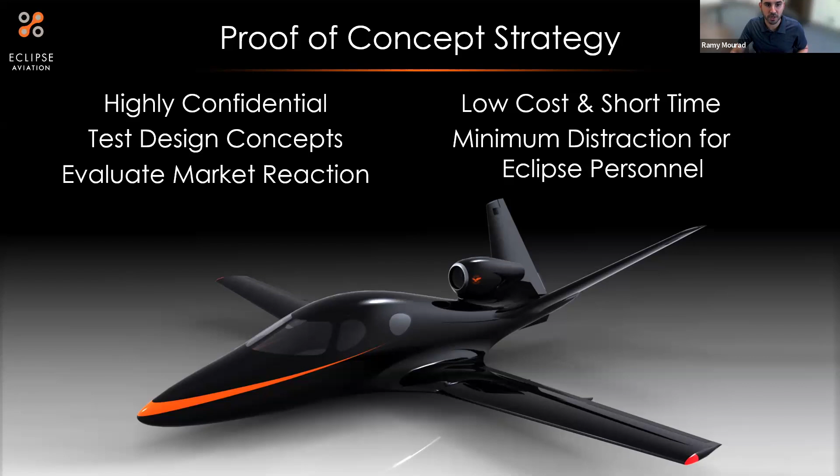So these were some of the very initial concepts that we came up with. One thing that's super important for the concept, it had to be sexy. It wasn't just about performance and being practical, it had to look freaking good. I don't know if you agree with me, but I think it does.

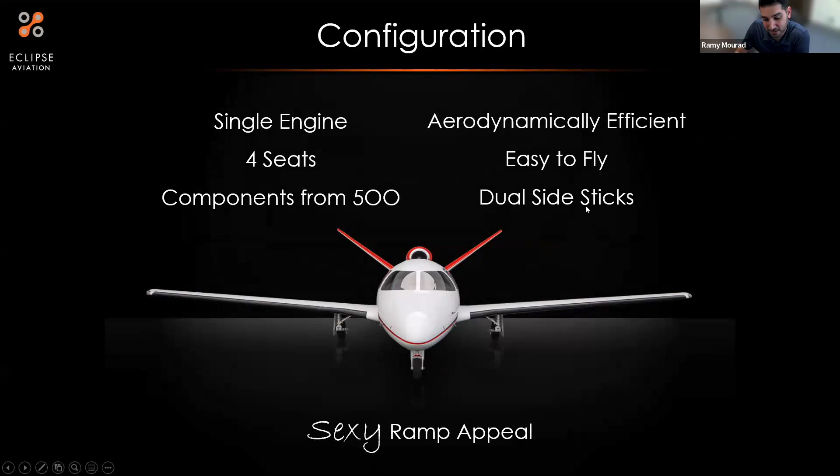Hey Mark, maybe you can talk a little bit about how these players came about. Obviously Eclipse was at the tip of the spear here, but you talked about how Swift got involved because of the performance. How did we pull in Basis, and what was their role?

Why did we have them involved? They're a supplemental type certificate shop, an STC shop. They take airplanes and make them into something a little bit different, so they know how to certify stuff and comply with all the practices you need to build an aircraft that's going to be flown by real people.

They were recommended to us by a company called International Aero in Long Beach, who were going to do the paint job. They said, well, you need to talk to Basis. So we got involved with Basis, and it was a total fabulous, fun time out there.

The year we were putting the airplane together was when they had this multi-week giant summer festival. Remember all the ice cream shops lined up? You'd go outside and there'd be Ferris wheels going, and you'd go to all the different ice cream Whippy shops. Yeah, it was a heck of a lot of fun.

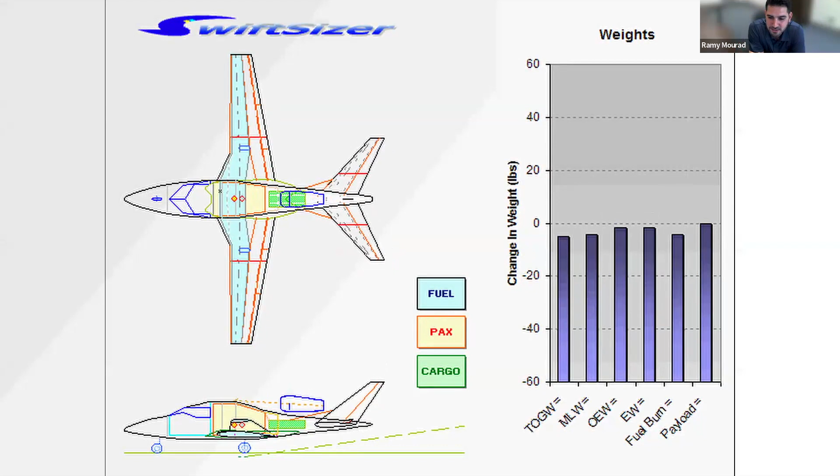Mark is the brilliant mastermind behind what at the time was called Swift Sizer. I think this has evolved several generations since, but maybe you can talk a little bit about what this thing actually does and why it was first put together.

So this is, as some of you who've seen this type of stuff before can probably tell, an Excel tool. It's an airplane sizing tool that lets me try all kinds of alternatives for rigging the engine, balancing the airplane, estimating stability and control, so I know where the fuselage has to go so the aerodynamic limits line up, and capturing the center of gravity vector with fuel burn off and different payloads.

Because it's this kind of visual environment, it's not an optimizer I turn on and let run 40,000 solutions overnight. You really guide it. You look at stuff and learn why something is bugging the solution, making it problematic. Often letting the computer run longer isn't the answer—you have to change something, add a feature that your model of the airplane doesn't have at the moment.

So I've used this on the BAT, the Killer Bee, on our airplane now, believe it or not, and on the much bigger version for the JetZero Z4.

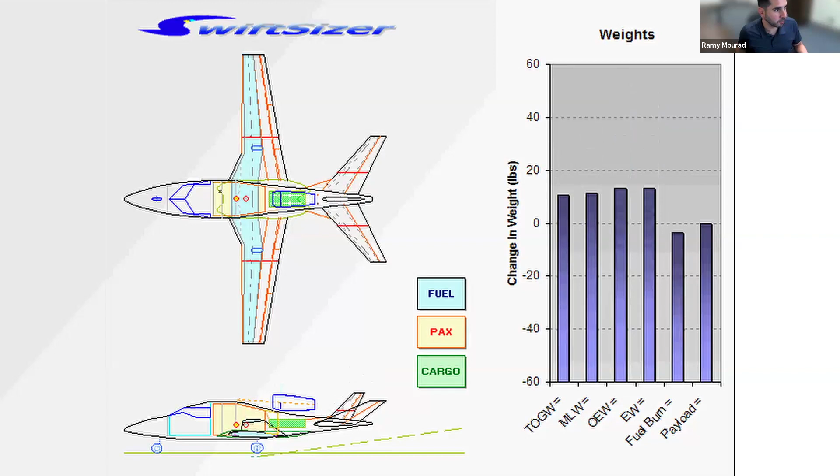So this is where our high level requirements help us configure the aircraft—what's the wing sizing, what's the distance between the wing and the tail, and the engine placement longitudinally. And so we ended up with the design, basically. I made this presentation a long time ago and was pretty excited about PowerPoint animations at the time.

I have a very different approach to PowerPoint these days. But so we got this V-tail mounted behind a single engine, and we wanted to keep it simple with a single engine. So we had to figure out how to deconflict the exhaust from the engine and the tail.

We had to make sure that in a rotor burst situation we're isolated from fuel tanks, and we'll show you some mitigations on how we handled a rotor burst situation with the flight control cables. We actually needed to do a lot of work—wind tunnel testing, CFD, and so forth—on the wake ahead of the inlet to ensure inlet distortion is properly managed. That shaped the spine of the aircraft and helped us decide the width of the aft fuselage from a structural perspective.

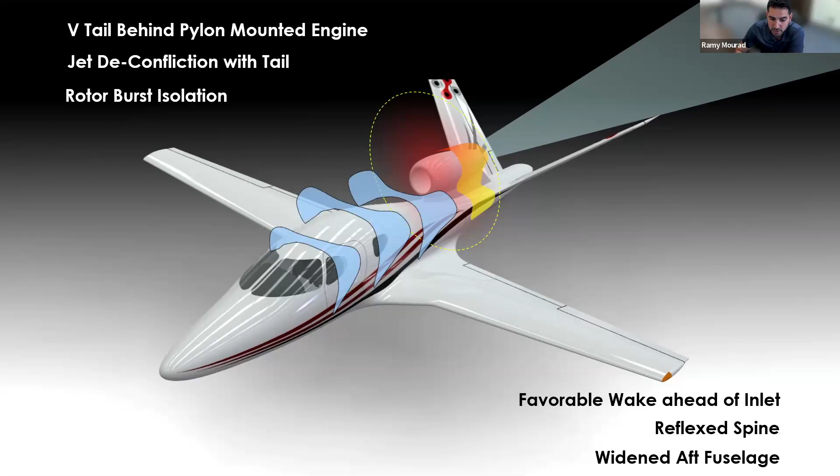So this is the rotor burst thing I was telling you about. Mark, I think your team were the masterminds behind this. Can you share what we're looking at here?

The red block is the envelope of how the FAA defines a failure of a rotor disc. You take a third of a rotor, blow it up, release it, spin and tumble it, and it fills that box when you smooth out the edges. You want to swing that box around the axis of the engine because the chunk could go anywhere, and you want to make sure that under no circumstance are all the controls to the tail cut.

So we had redundant cables left and right, and you can see them at the bottom. You can see how we spread them so that the possibility of an engine rotor burst would never take out all the flight control—you would always still have flight control, even with a complete explosion of the engine.

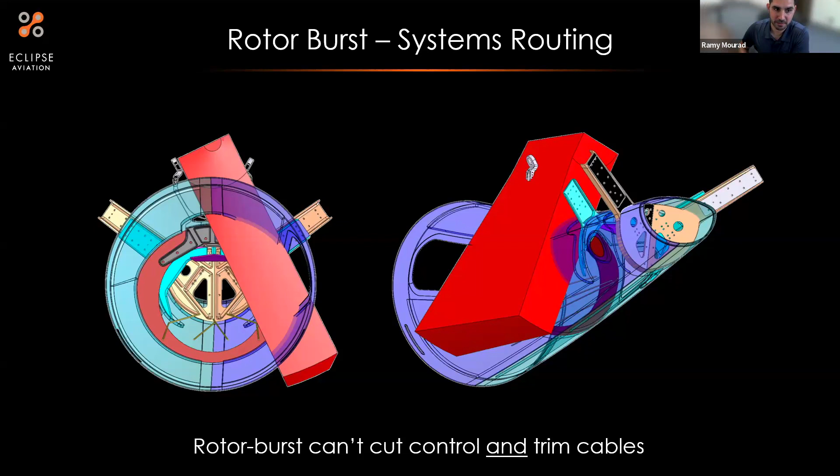Very cool, and a very important piece of early design, because if we thought about this later it would require a massive redesign. So this early flight control, safety-critical flight systems work in the early conceptual and preliminary design phase is absolutely critical.

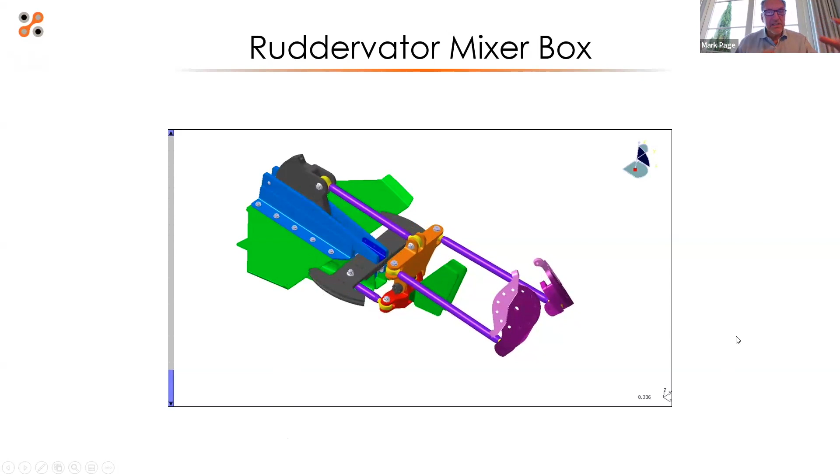So if I want to do a pure pull-up, maybe both elevators come up 10 degrees, same direction. If I want to do a yaw, I might have one up at 10 degrees, the opposite one at minus 10 degrees. And I can mix everything in between, and it actually makes exactly the same sense of an airplane for the pilot as a dedicated rudder and a dedicated elevator.

And I'll tell you, as someone who had the privilege of getting several flight hours on the airplane, it felt so good. You'd think maybe there's friction in the system. It felt so good and so natural. It was really, really well designed.

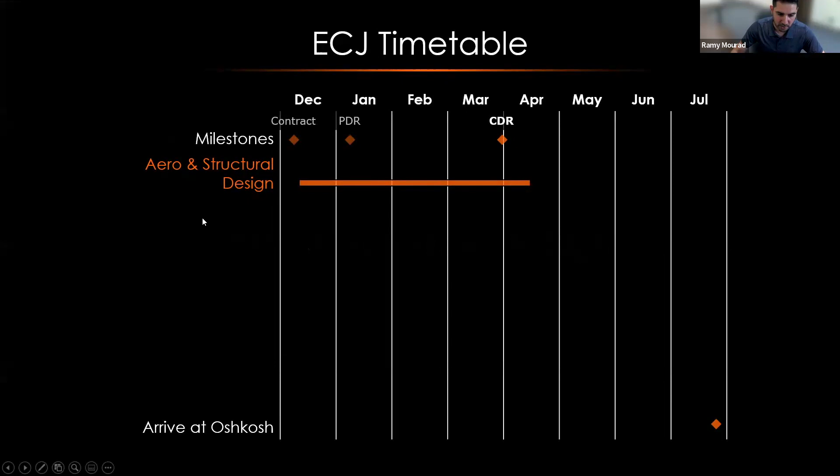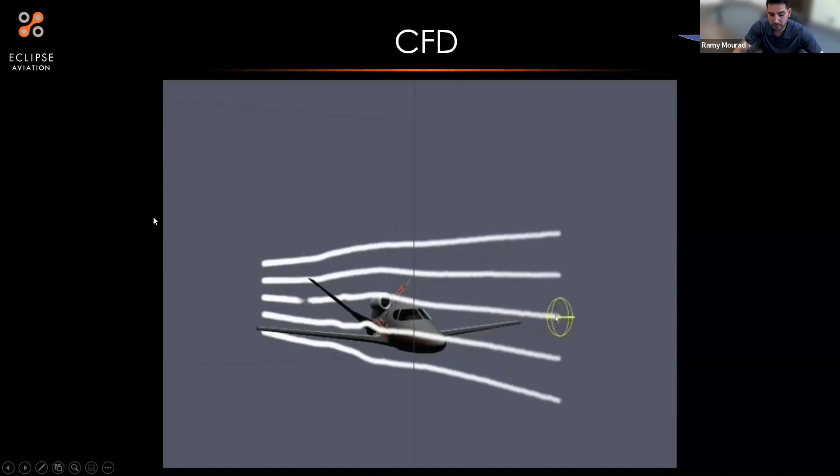Okay, so aerodynamic and structural design. Notice the bar here takes us from the very first day all the way through CDR. These aero and structural designs are obviously highly coupled as you make changes to optimize aerodynamic performance and efficiency. You have to make sure that the aircraft is structurally able to do that. So we used computational fluid dynamics. These are a lot of the Swift tools here that, Mark, you guys had a chance to use.

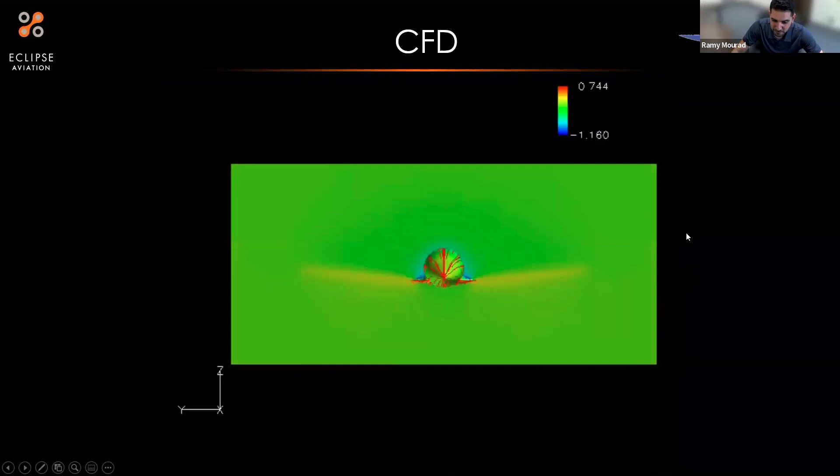I love the smoke. Yeah, definitely. It's just so cool. Any thoughts on the initial CFD work?

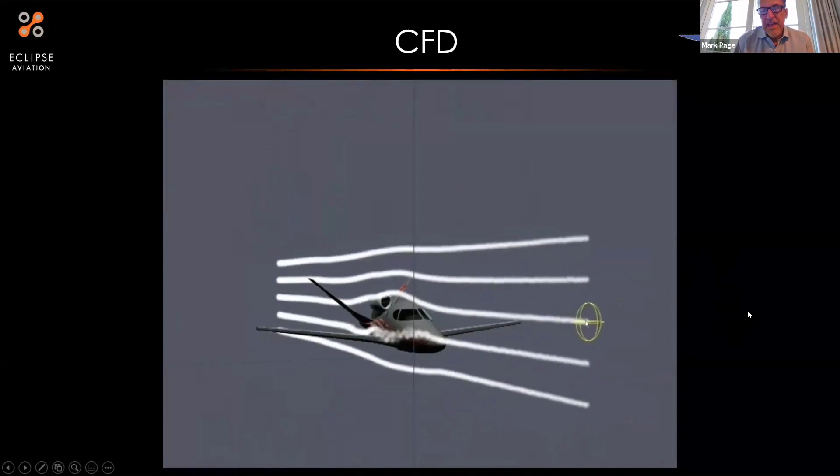So the thing that probably isn't apparent on the schedule, and you made a comment on that, Ramy, to do the airplane that fast, we had to parallelize things that would normally be done in series. So everything had to be parallel. The one thing that had to be released immediately: we were already under contract, and then 3 weeks later, after Christmas vacation, we released the outer mold line for the fuselage, tailplane, and nacelles. They were all done, designed. We did all of our CFD because we had to. And if it wasn't quite awesome, well, we'll do a wind tunnel test later, maybe fix some things.

So that was essential. For those of you making any vehicle, outer mold line tooling, OML, the surface, the thing that's on the outside. If you can make all the tools for making an airplane of the right shape, the outer mold line, you don't have to know what the structure looks like yet. You can make a tool. Everyone can be making that tool that you're going to mold it in. You get people started right away on a big, heavy project.

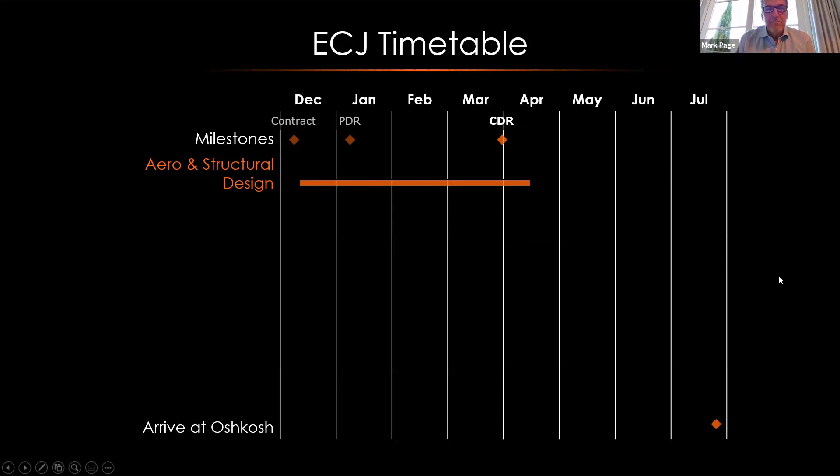And then your engineers are also figuring out how deep the spar is going to be, how thick the spar is going to be. But we picked a thickness for the skins that was good enough. And then the guys and gals could populate that with spars, ribs, and everything else months later. Great point.

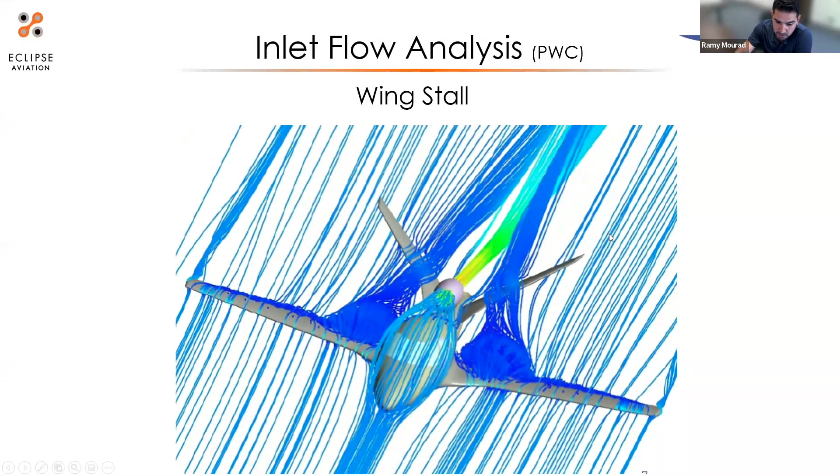Let's get past this one. So here's some more analyses that we had to do to ensure all the various flight configurations and flight envelope are explored in CFD before actual tests. So we have a good sense of how the aircraft will behave in high angle of attack or high sideslip.

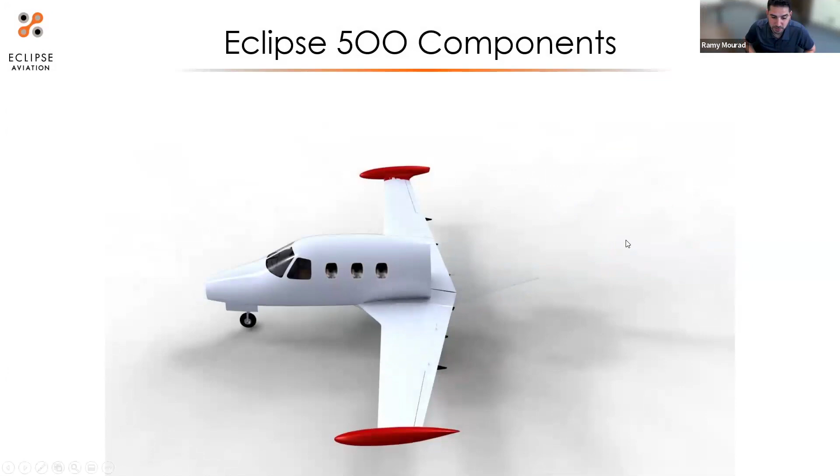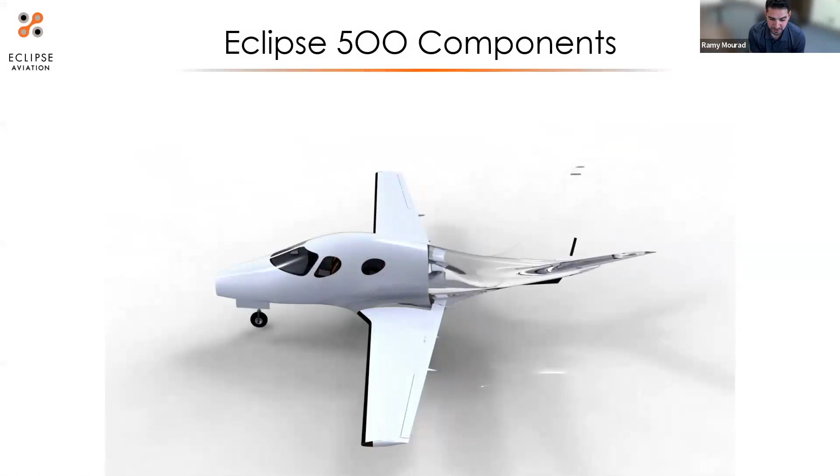And like Mark said, that outer mold line was designed and pretty much locked in within weeks. Then we had to figure out the structure to make it all work. So this is a really fun animation here. Pay close attention to what's disappearing and then what's built back up. It started as the Eclipse 500. We wanted to use as much as we could from the Eclipse 500, but not much was left. We basically ended up with the wings, the nose, the avionics, and the Pratt & Whitney engine. And the rest was designed up from that to rebuild it into this aircraft.

And that was a huge element of success because all of the systems that were plugged into this airplane had already been tested for compatibility, were fully certified. We knew that nothing was going to happen with voltage mismatch, nothing was going to happen with bad grounding. The first time we turned it on, everything worked perfectly.

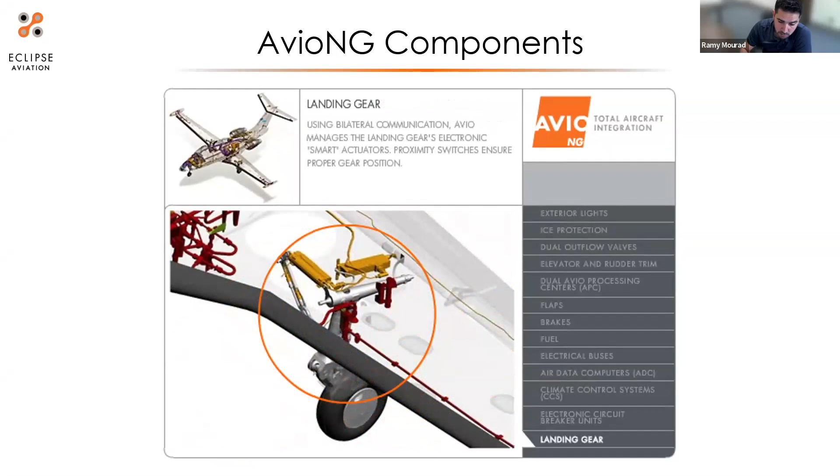Yeah, that is a really important point to take here: if you want to go fast, where one could reuse in a modular way proven technologies, the hard stuff, avionics, actuators, engines, where you can not reinvent the wheel, you can make progress quickly. So here's where we got to borrow known components from the Eclipse 500. But this was all new structure here. So this is where we focused our energy.

And yeah, go ahead, Mark. I was just going to say that you can see the cockpit and passenger area kind of in gold. So that was, believe it or not, fiberglass. The tail cone was carbon. The reason the cabin was fiberglass was we were going to mate it directly to the aluminum nose gear barrel. And so the coefficient of thermal expansion difference between the materials was reconciled by using glass on the forward part and then really high performance carbon on the aft part. And of course, in manufacturing, you can make it all carbon, but that was an interesting element.

And the other thing I'll say about the stuff you're about to see, we did all the structural design. We did our own structural analysis. We had an independent company take the same finite element model and do an independent analysis. And we only changed one thing, and it was one little link right there in the engine mount. That's the only thing we changed after all that work.

Yeah, Mark, a thought came to mind here. So weight is always a challenge when you're trying to defy gravity, and airplanes get to do that. Ideally, this airplane design was conceptually much less than the prototype we built. Can you describe why and the whole concept around the safety factors on the first prototype and so forth? What thought process you and the engineering team had to go through to ensure that the first airplane works?

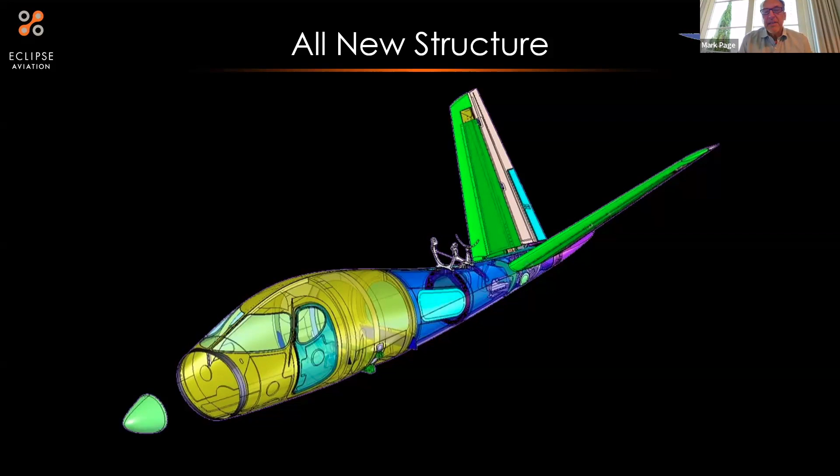But these structures, obviously, if you're familiar with composites, you know the specific strength, how many hundreds or thousands of pounds an aluminum bar can take compared to a carbon bar of the same shape. And so the carbon has much higher properties, especially in stiffness. So you can make it lighter. Whatever you have to do in aluminum, you could make it 2/3 the thickness or sometimes half the thickness. That was key. And it's very easy to manufacture.

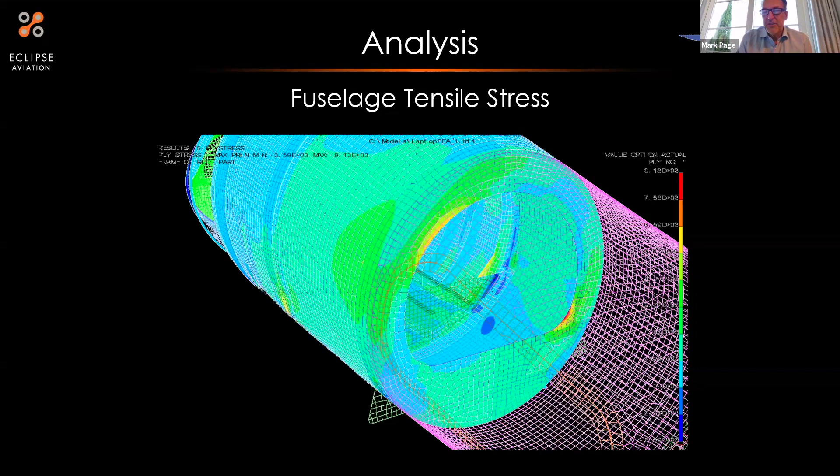What was your safety factor as you're designing this? Right. So traditional aerospace is 1.5 safety factor, so 50% more strength than you need. And you also have specific maneuvers that are also beyond what any pilot would do normally. So we have 2.5 G. Actually, this airplane, I forget, it was actually 4.5 Gs and 1.5 safety factor, which I think we bumped to 1.8, if I remember right. Yep. Just so we could be less perfect and get it done faster.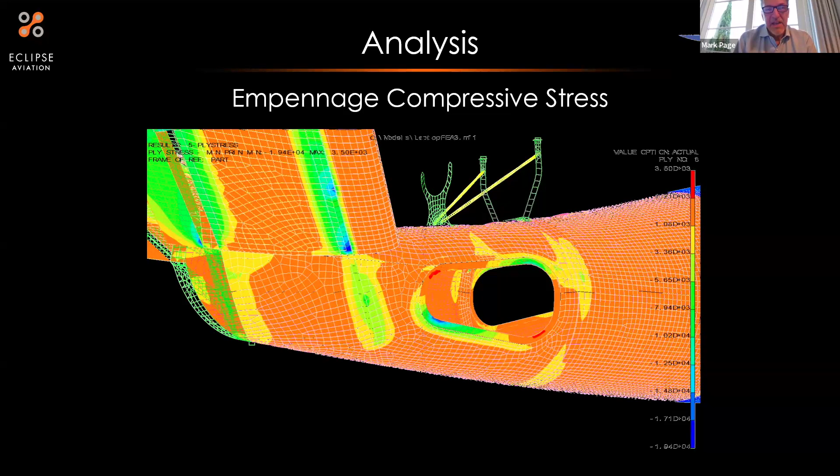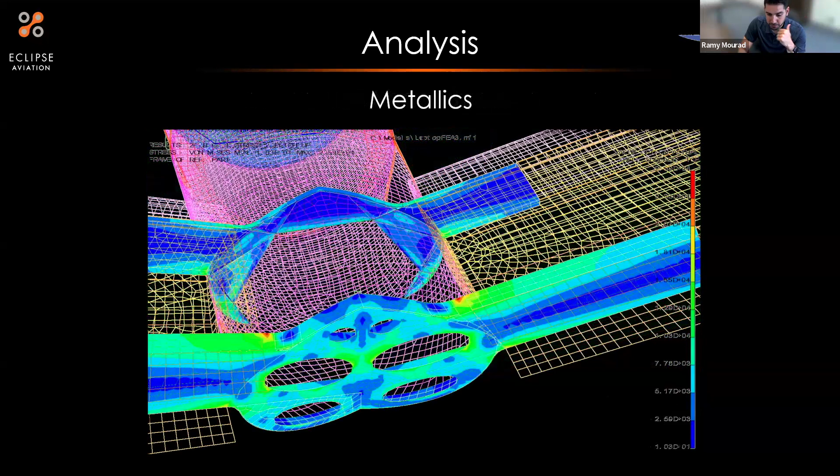Yeah, I think in some cases we went up to two or even a little higher than two, just where we were a little concerned. We would just bump up the safety factor so we wouldn't have to iterate on that design. We had no time to do that. So the airplane ended up heavier. But the purpose, the mission of showing the concept to the public, demonstrating flight, we still achieved.

So we just had to make some trades when it came to flight test, a little longer runway than the ideal airplane would need, and so forth. But that was some of the stuff we had to do from an engineering trade perspective to make sure we hit the mission on time.

We're going to speed it up a little bit here, Mark, because I'm just looking at time. So I'm going to go a bit faster.

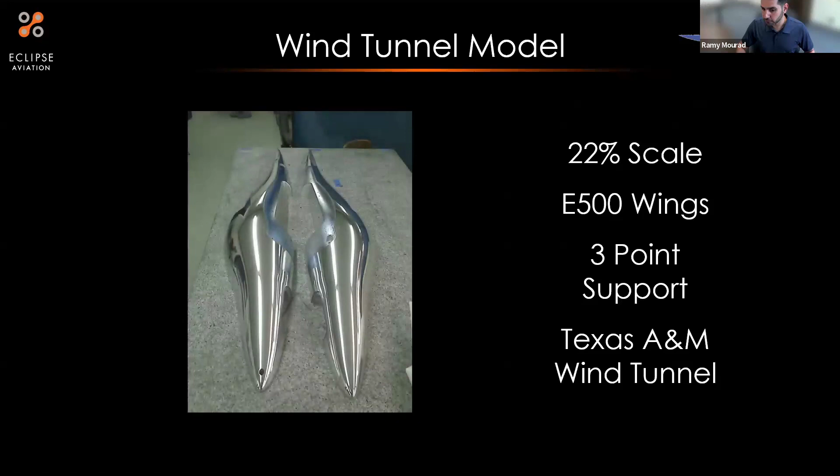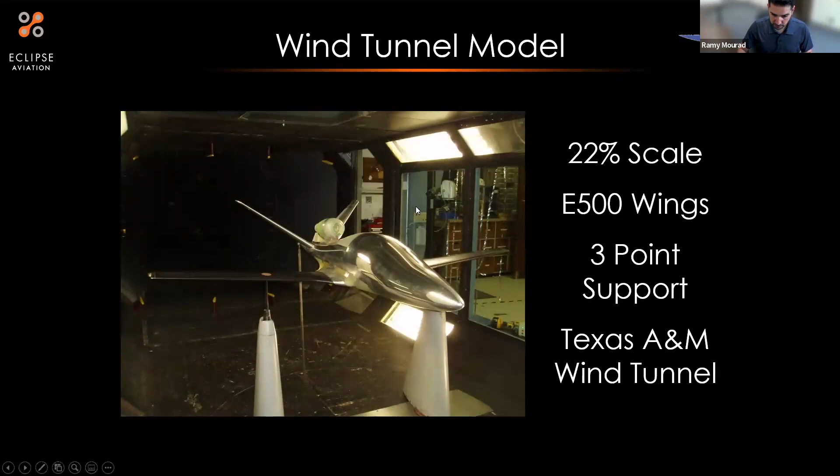Really, really fun stuff with wind tunnel work, where we're basically now validating the CFD with the wind tunnel models, and some of this stuff gets really, really intricate. So you can see the engine here with the inlet distortion rakes. These are tiny, tiny little, basically pitot probes here that are measuring the different pressures all around the inlet to help us make sure that the upstream shape of the aircraft in the various attitudes wouldn't starve the engine of the air that it needed to operate properly.

So that level of precision was done in safety critical areas.

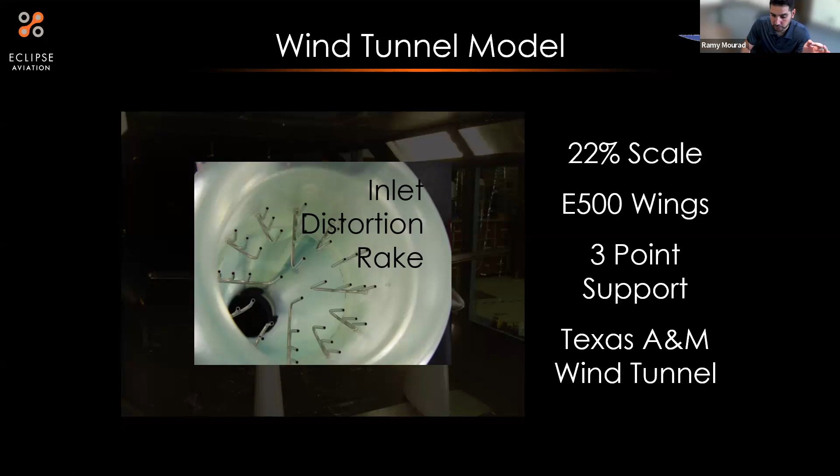Anything you want to add here, Mark, on the wind tunnel? No, you keep going, man. That's it. You did good. All right, cool. Oh, this was really cool. Why don't you take this one, Mark?

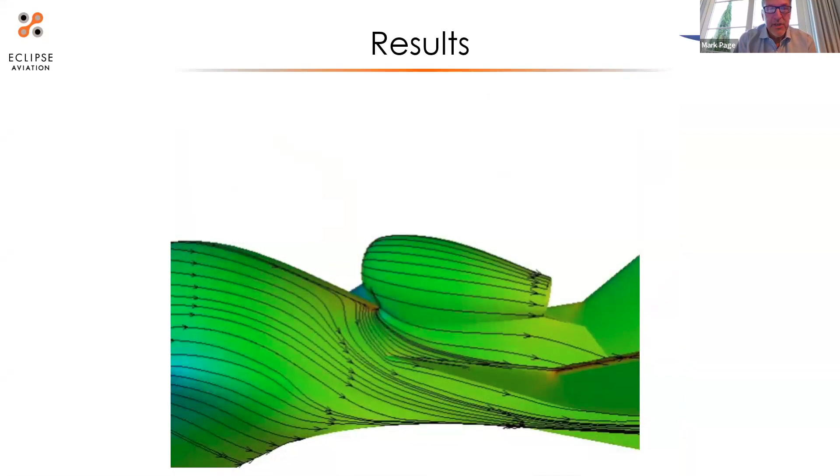So I'm going to overlay the CFD on this. So these are your oil dots. These are the oil dots we were talking about. You put these dots of oil with a pigment on, you walk away, you fire up the tunnel or fly the airplane. You make the goo so it doesn't start moving until you get above a certain speed. And then it's like having a Polaroid of tufts on the airplane. It's showing you where all the air is going and where there's mischief.

And if you look at just in front of the engine and below, you can see, wow, there's a lot of deflection there. Those streamlines are being pushed out, and there was a little vortex there. And we cleaned that up during this test, but it takes us in the direction of understanding where we have trouble.

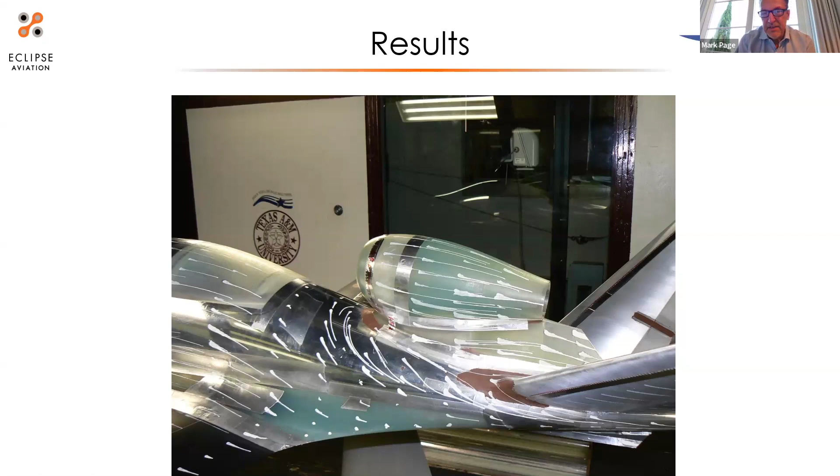Look at the bottom, the bluish thing near the bottom. That's the fillet between the wing and the fuselage. The pilot would be looking to your left. You can see the V-tails to the right. And that piece is really important because it's hard to keep that attached flow. That's hard to keep from stalling, making the flow go crazy.

So if you look at the dots, some of the dots aren't moving, but all the dots that are moving are going aft. That's okay. If it slows down really great, that's okay. But if the dots go upstream, that means you have a massive separation vortex there, and you have an instant recognition of a problem area. So we were pretty pleased with this because it was just on the edge of stalling, but didn't.

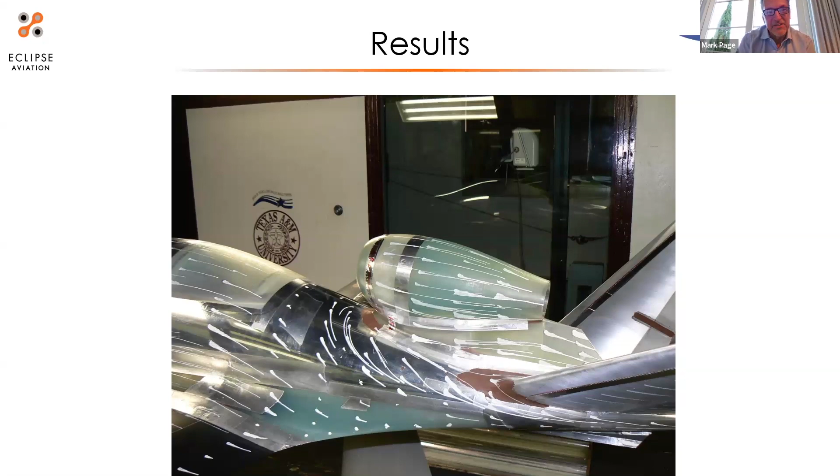This is one of my favorite learnings on this program, and so a testament to CFD work. And now, nearly 20 years later, CFD work is much higher precision. But you could see basically what happened in the oil dots was predicted and validated with the wind tunnel testing. That's where that type of testing really helps us.

All right, so now we build the airplane, and look at when we started building. So Mark mentioned building tooling for the outer mold line ASAP. And we literally started building the airplane well in advance of CDR, critical design review, where you lock down basically your detailed design.

So this is a slideshow, Mark. Why don't you voice over the slideshow just real super fast? You bet. So you can see the autoclave. That's that big cavity there that gets pressurized and cooks all the parts.

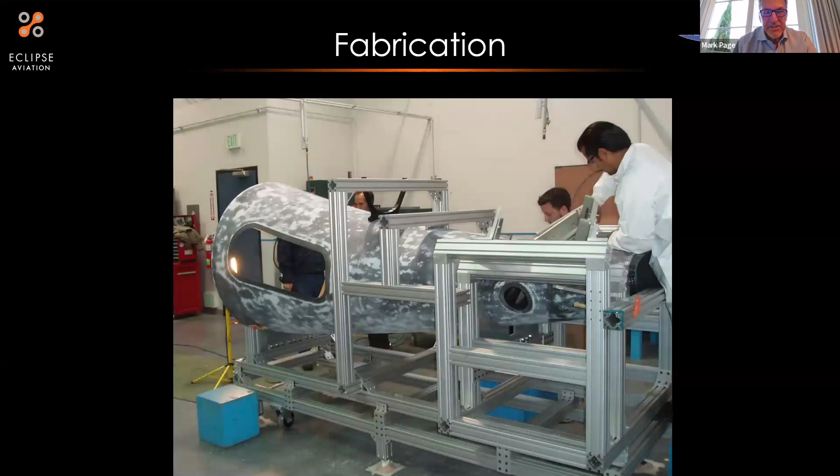Here's the aft barrel of the fuselage. You can see some white splotching on there. We were about to deliver it with some little imperfections in the carbon because we didn't need the best quality stuff. And the guys were just going to send it with little wrinkles. I said, no, you're not. So they cut it up and filled it and made it flush, but it looked so bad, people were scared.

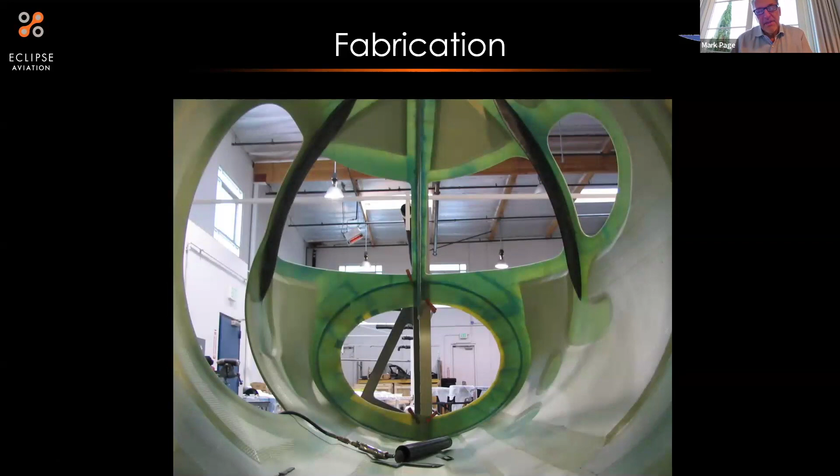But here you're looking forward in the airplane, this fiberglass part of the airplane. You can see there's some foam in the kind of yellowish areas. Those are foam blocks so that you have a layer of cloth inboard, a layer of cloth on the outer side. Together they make a type of an I-beam and really stiffen the structure.

All right, so we started building the stuff in mid-January, and we started assembling in early March. CDR is at the end of March. The thing that's interesting is that by the end of February, everything was actually already built, so it was ready for assembly. So 3 months into the program, all the parts had been made. Here's Area 51.

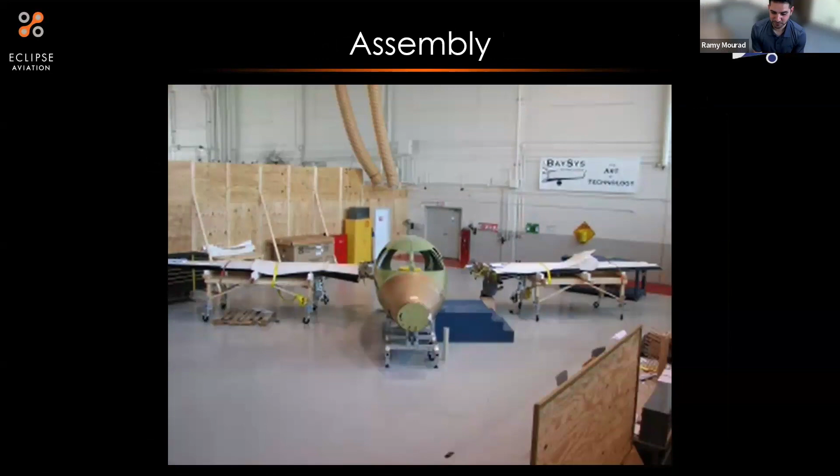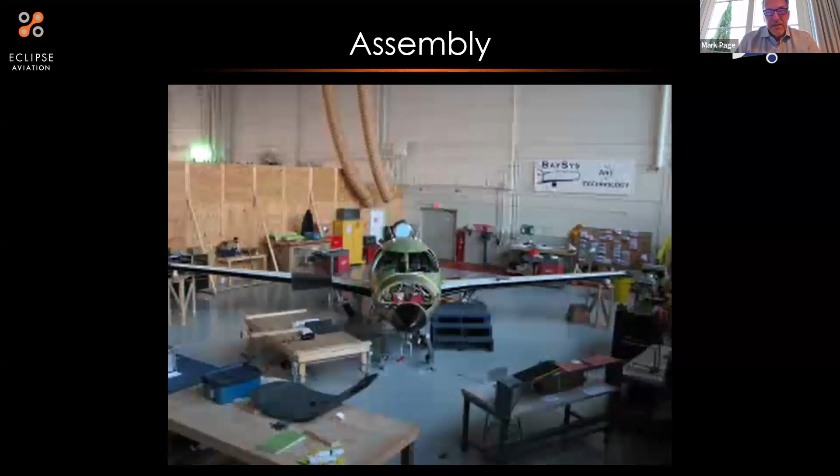And these folks were so skilled, so capable, and they really loved working on the carbon and the aluminum parts of the airplane. They thought it was fantastic. They were always told that's really hard. Well, you heard about the weight issue we had on this thing. We had a factor of safety of 12 in some of those things.

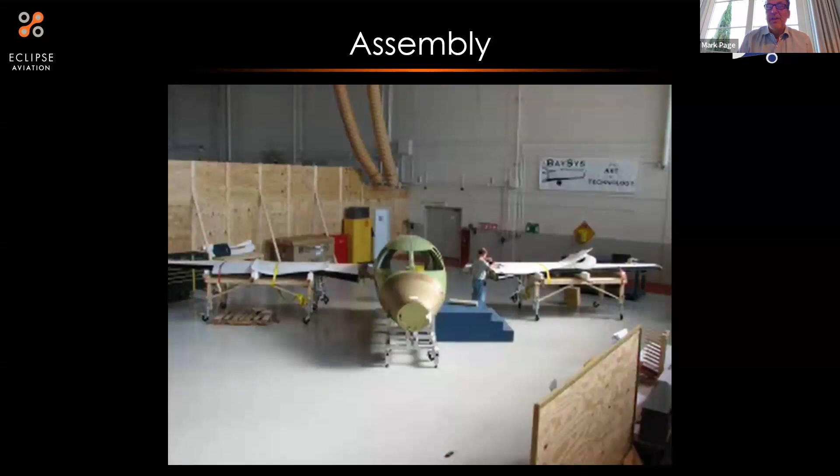I had a little talk with my structures guy afterwards, but we ended up overbuilding it. And so those guys could drill right through it. Shoot, they could screw into it. In the real world, you could never do that. It'd be much thinner.

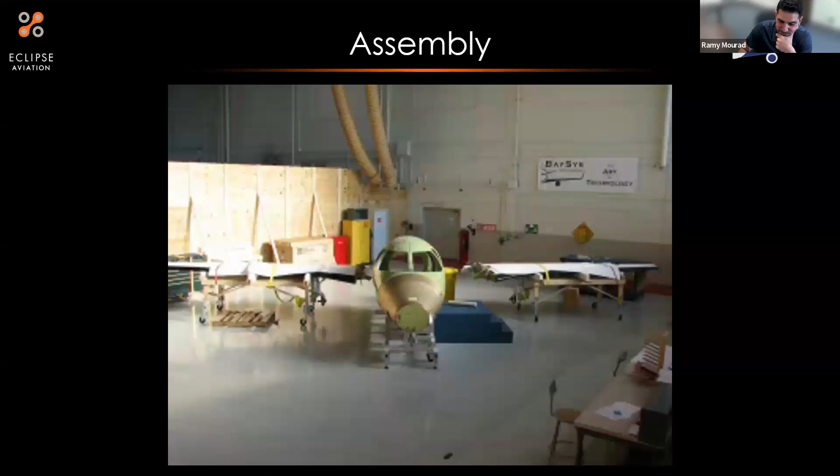Yes, that was one of the benefits of designing. And here's how we make it pretty - we had done a little bit of testing before we started painting, just in case, and we'll show you pictures of that in a minute. But here's how the airplane basically came together, and a quick 360 around.

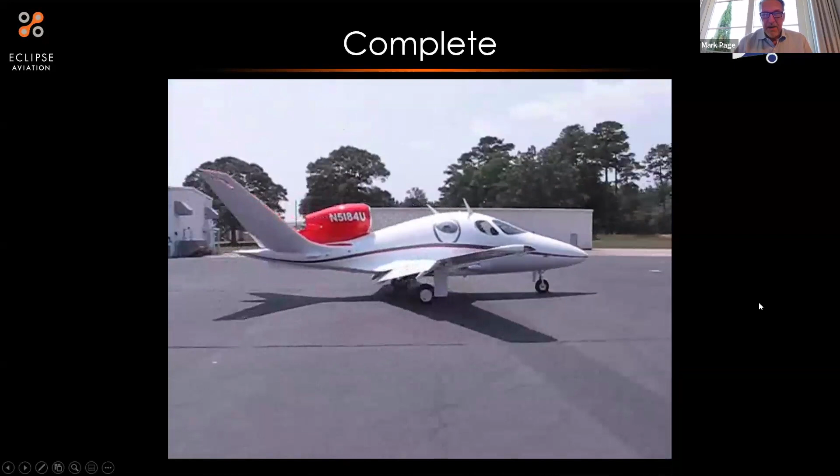This is me in my rental car, hanging out the window with the camera, one hand on the wheel. Yeah, I love it. Orbit. Our team at the time was probably actively there about 20 to 25 people, building, designing, all the things.

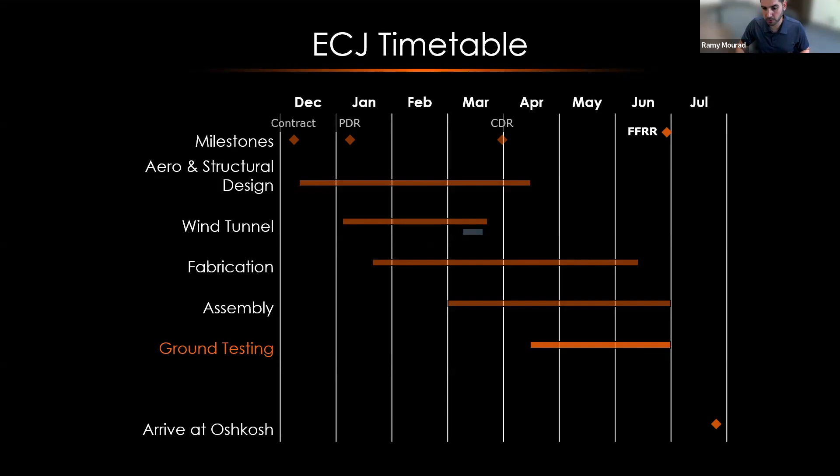All right, so we start testing. First flight readiness review is what FFRR stands for. We start ground testing as soon as the airplane is assembled, prior to paint, and actually as soon as critical systems are integrated. It wasn't even fully assembled when we started making sure stuff worked.

This is a kind of a loud video, I'm going to skip over it, but basically as soon as the airplane reached this state, we did all of that stuff on the left. We tested our flight control cables. We tested the motor. We had to make modifications to the software and the avionics to trick it into realizing it's okay to have only one engine, because it was designed for a twin engine airplane.

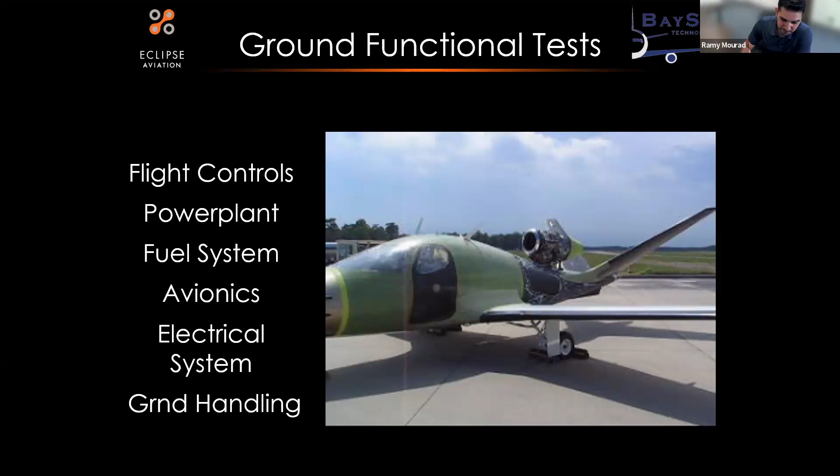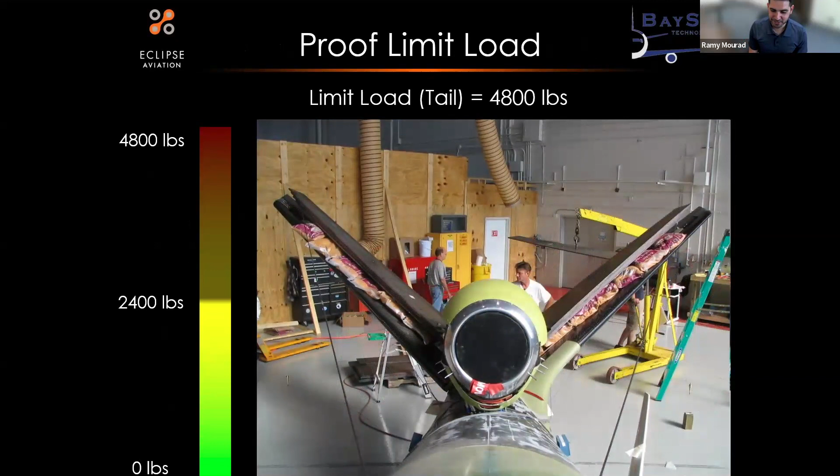And we actually started taxiing it around a little bit to make sure the nose wheel mechanism was working. Rudimentary proof limit load tests - weights and sandbags. The sandbags buffer, but we're actually adding plates of steel to put the load on the tail. Much easier than making a whiffletree with frames and all that stuff.

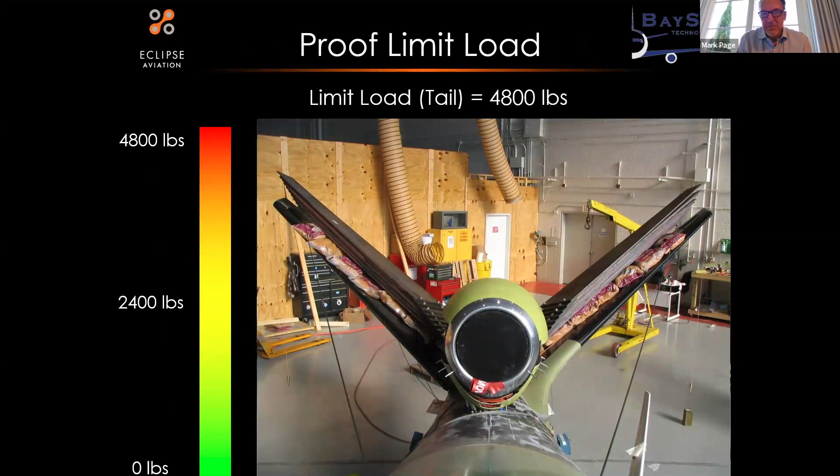And it passed with flying colors. We were very happy. I love the group shot after this. 4,800 pounds, amazing.

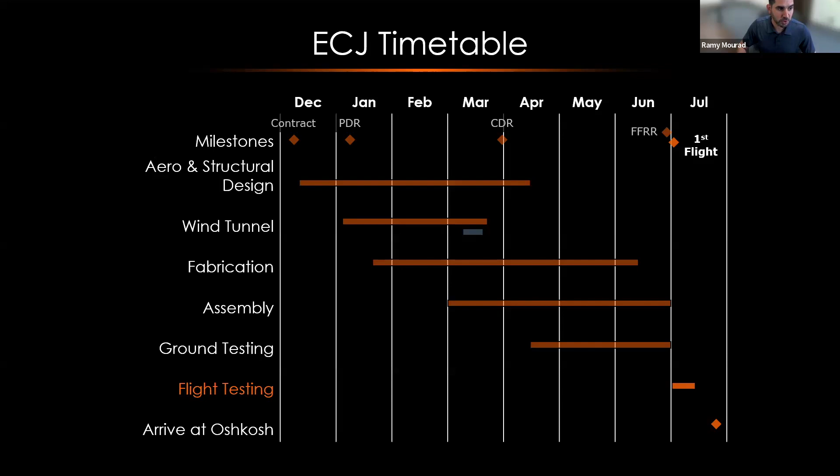Now, my role was flight testing, and so I joined - well, I joined during the ground test period, and spent a lot of time on site through flight tests. Had a chance to open the envelope with the chief pilot, Terry Tomini, who spent a lot of time on the design too with Mark and team. We opened the envelope with 5 flights, single pilot, and then the rest of the flights, the flight test engineer, my role, I was flying right seat with Terry. So I had a really great opportunity to think through how we help each other as we expand the envelope and ensure the airplane's ready.

At that phase of the program, Terry Tomini, our test pilot, and Ramy, they were actually running everything, overseeing all of the work we did to validate these tests. We had to find a big muscly guy to put 300 pounds of push on the side stick, and we were doing all those very rudimentary things - hanging weights from the control surfaces, all sorts of that stuff. But every one of those steps, that entire process, Terry and Ramy put together, and they'd only discovered the airplane existed a week or two before they flew out, and they were suddenly assigned to the project.

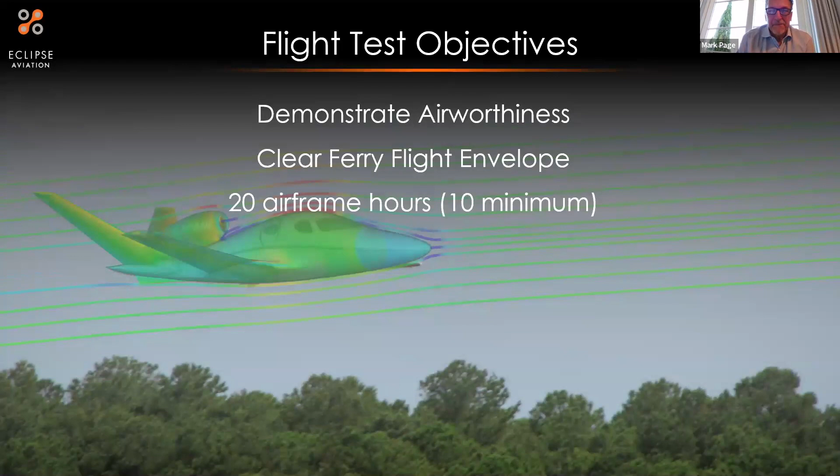So, yeah, what a day that was. If you haven't had a chance to experience a first flight of a product that you spent a lot of time on, it's almost impossible not to get emotional. The first time it does what you intend it to do is such a rewarding feeling that it's hard to describe. For those on the call who have experienced that, you know what I'm talking about. But for others, GoAERO might be your chance to feel it for the first time. It's wild, it's wild - bucket list stuff. If you like building things, it's hard to beat.

So our objectives during the test program were to demonstrate that the airplane is airworthy, get the ticket we need from the FAA to fly in an air show, clear the ferry flight envelope we had to get from Virginia to Wisconsin, and get a minimum of 20 hours on the airframe. Actually, 10 was the minimum - we overshot that, obviously.

I got to ride, I think it was flight 6, where we were going to do the flutter envelope. So we go up and get on condition, and then the pilot takes his fist and punches a controller, kicks the rudder, and we want to make sure everything damps out after that's done. So we do that, have some very, very formal program.

And then he said, watch this, Mark. He banked the airplane, pulled back, trimmed the throttle, trimmed the pitch, took his hands off the wheel. There we were in a steady 3.5 G horizontal orbit. He said, I can't do that in the F-16 I fly. But we could do this. Yeah, it was really cool.

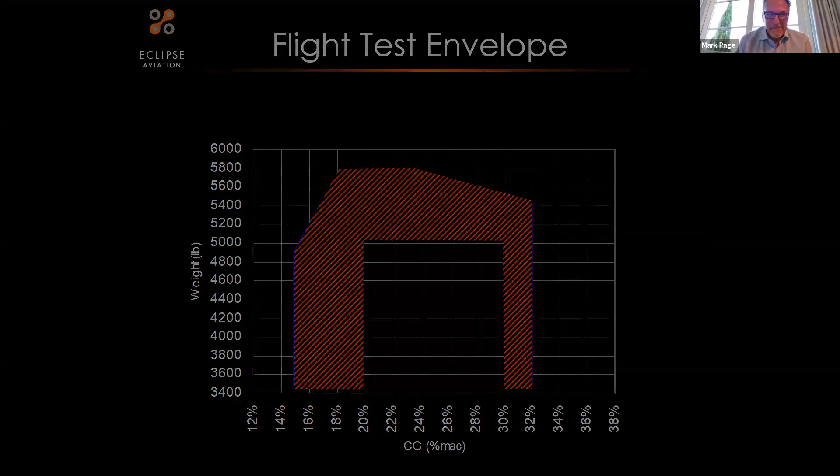So we flew 19 sorties in Wallops. We got our test conditions done. Just a phenomenal flight test program, with a few discoveries along the way that we overcame together. This is where everything comes together and the whole team is extremely engaged. You fly, everyone's immediately reviewing the data, what's working, what's not, what do we need to tweak for the next flight. It goes so fast, and it was riveting.

We got to the point where we were so comfortable with the airplane that we safely expanded some light aerobatics. With the FAA, we were certified to do light aerobatics on the experimental ticket for the air show.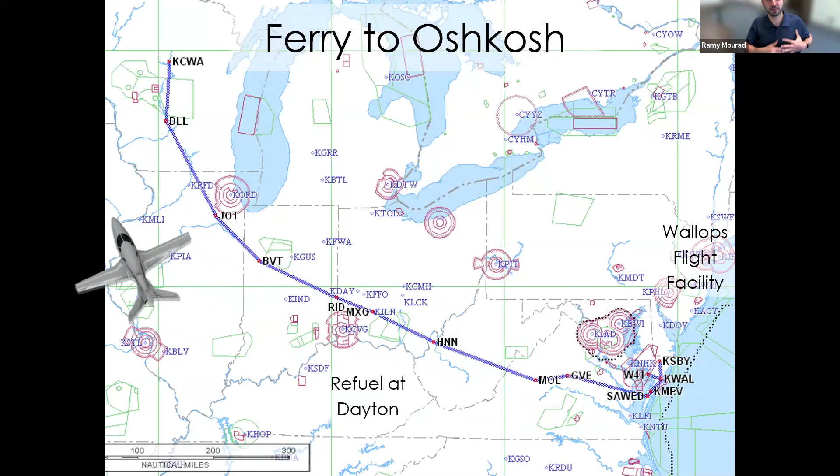One of my favorite experiences was taking the airplane to Oshkosh and trying to be covert about it, having conversations with air traffic control along the way, or landing at FBOs and people asking, what is that? We were like, oh, we can't tell you. Putting duct tape over our Eclipse badges - my animation got screwed up there, but pretty fun.

So oops, there's a little bit of a slideshow on this one. Here we are at Oshkosh. Made an immense splash - mission accomplished in the sense of getting the public feedback. It was wild. This is Terry doing a whifferdill at Oshkosh, like a 90-degree bank there.

Some key lessons learned here on how to do something like this. I'm just going to put them all up on the screen.

Obviously if you haven't gotten the hint from Mark and I - efficient and safe development test, leveraging how fast you can work with a small team. I remember every day having an all-team meeting, 15 to 20 people in a single conference room. How many days do we have left? How many dollars do we have left? And whoever said they were going to do a thing, it was never second guessed. There weren't a bunch of people trying to track it. It was just, I'm committing to a thing, and my team trusts me. I'm going to get that thing done, and I'll follow through, or I'll let them know I can't. That level of trust at the individual level was there across the entire team. That's how you can go fast with confidence.

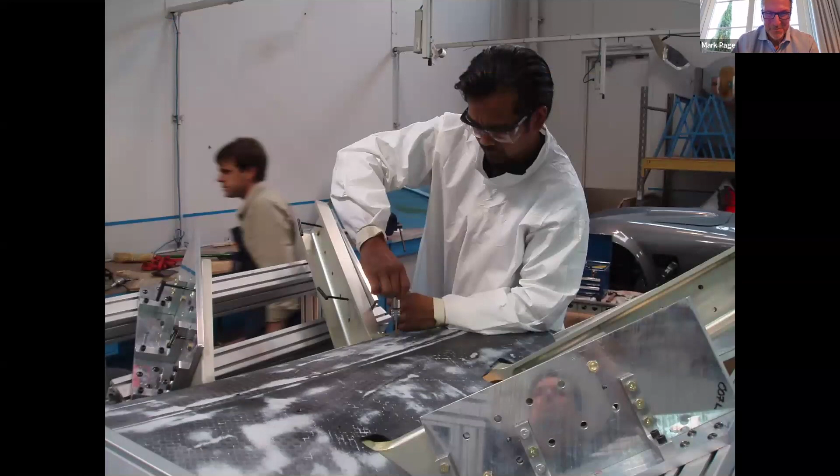To be able to do that effectively, my second piece of advice is: test as early as possible. Test whatever idea you have, as early as possible. You don't wait until the very end to bring all the systems together and test, because often integration is the hardest part. So test the component, test the subsystem, test things as they come together as you design them. Prototype, get that integration at the lower level done first, and then it gets easier as you expand out. So make a plan, not a 10,000-line IMS, and test as early as possible. That's how I - amen, brother.

If you were to build a GoAERO aircraft, what type of people, experts, specialties would you want to have on your team?

So from my perspective, if you're familiar with the Innovator's Dilemma book, the author did a lot of study and found out that success comes from having done it before three or four times. Now some colleges working on this won't have that luxury, so find anything that's close and relevant. People who build furniture - they're going to be great as fabricators. There are all kinds of ways you can find people to contribute where they're actually using their skill, even if it wasn't on an airplane.

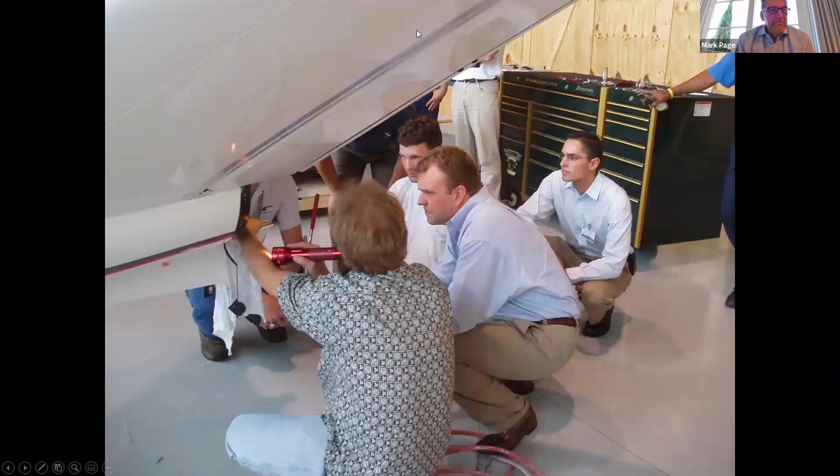For me, to amplify Ramy's comment - I kid you not, working on some Navy projects, we just took some flat sheet balsa airplanes, made a profile of the airplane, a top view of the airplane, so in front it was an X or a cross. We put the wings on, the tails on, the nacelles on, found out where the balance point was, and gol darn it if that wasn't plenty good enough to make sure it was stable and didn't amplify. Just basic stuff is actually very valuable - you'll be surprised. Make a subscale RC model, not the real thing, but something that lets you exercise and try things. Way worth it.

Yeah, I got nothing to add to that, Mark. Anything to add, Ramy? Nope.

All right, as this is a manned aircraft, how different would the process be for an autonomous aircraft? It'll certainly be simpler. The crew station and all those accommodations are complex, but in this case, we didn't have to figure out the autopilot like the Eclipse engineers did for the 500. We got the benefit of a basic inner and outer loop that was close enough to work. It was adequate.

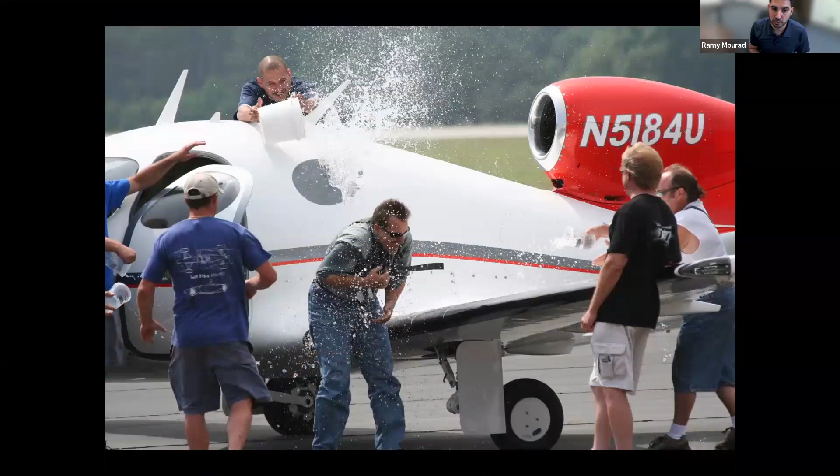So I'm trying to think what else there would be. I'd say that in the design phase, there will be a lot more time spent in software and algorithm development for how you control the aircraft's navigation, how it senses things - instead of human eyeballs and human hands and feet making inputs, how the airplane itself will sense hazards and make decisions to avoid them. That requires a lot of math and some software acumen, maybe using MATLAB or Simulink for modeling.

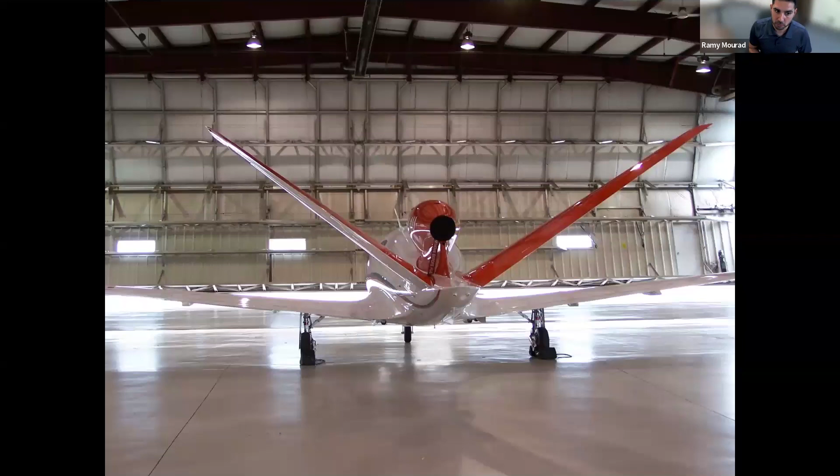So I think the biggest change, like Mark said, is it's easier from a safety management perspective. You just got to make sure you can take a little bit more risk, and make sure the airplane doesn't potentially harm people on the ground. But it does get a little bit more complicated in the algorithm development.

Now, with any airplane development, if you have high energy, whether electrical systems or whatever, building the aircraft itself can be very dangerous. So your safety management system in the manufacturing and fabrication process has to be on point just to keep your teams safe through the build process.

Just a side note on that - speaking of building, in stage 2, the prototype stage, we can build full or subscale. Would you choose one over the other, and why? I've had that question many times before and had the opportunity to test that thesis.